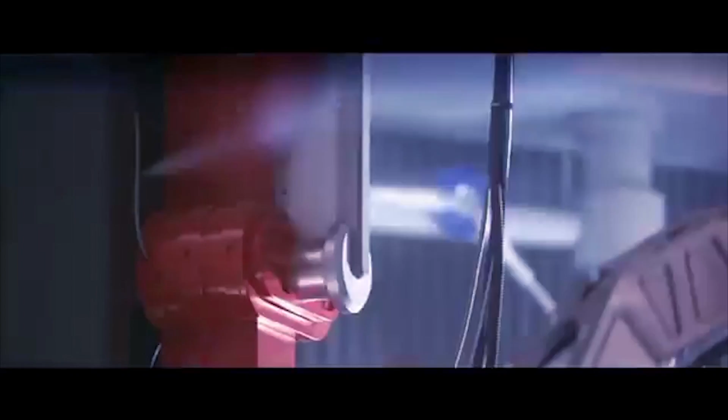Initiate drop sequence. Notice the device on her forehead. 1992 - that's Pierce Brosnan for those of you who don't recognize him. I never plug a program when I'm engaged. You just move the whole effect. Gentlemen, I'm thankful to say it's been 17 years since we last had occasion to use this camera.

So what we saw there was telepresence with Jodie Foster. We saw virtual reality - in 1992, one would wonder if Palmer Luckey saw this movie, and over 20 years later got $2 billion from Facebook to make exactly that device. And third was the augmented reality of the glasses.

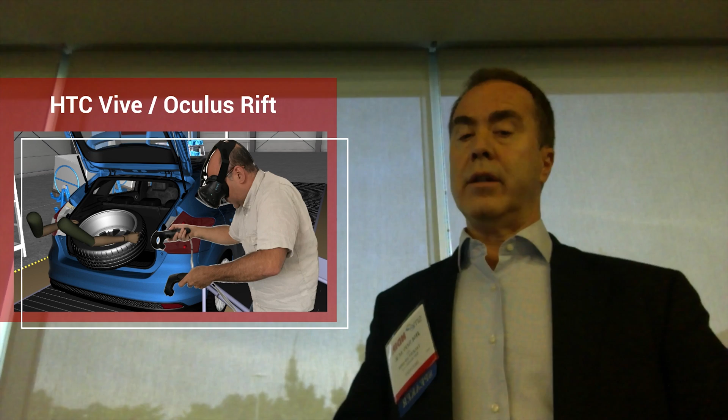We have the HTC Vive and the Oculus Rift for virtual reality, which we all know now. Here's a very good example, similar to the ones Michael showed—this is a company we collaborate with in France. They're actually certifying their operators.

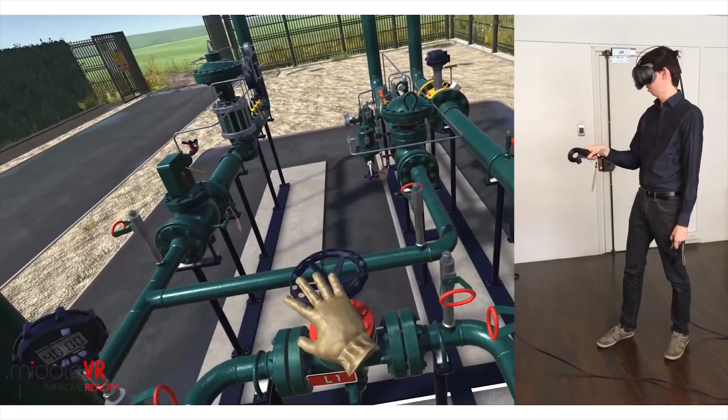Notice that the pressure—sorry about the sound, it's too loud. But the point is that this is being used today to certify gas operators before they go out in the field. Obviously the same thing can be done with any kind of complex machinery.

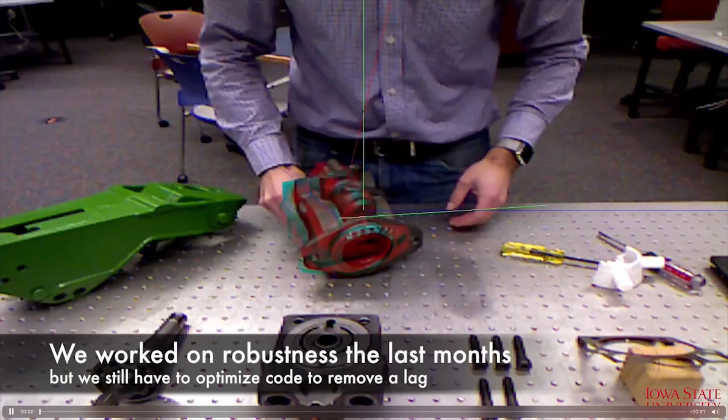HoloLens, everybody knows. This is a very good application of augmented reality where you see the part superimposed on your field of vision—it's kind of magic. This is obviously a very good application if you're doing complex assembly.

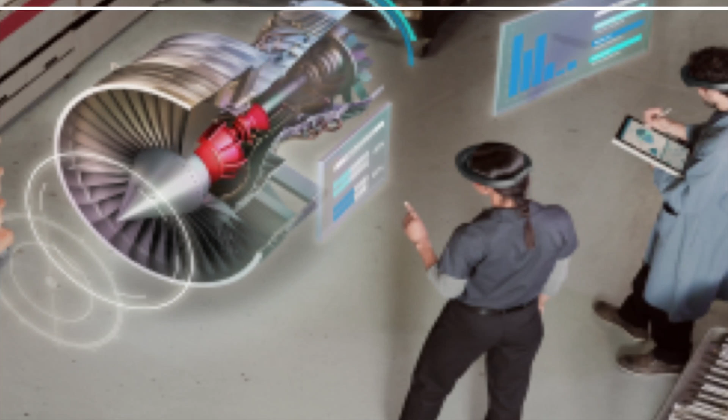The problem is that building these systems requires quite a bit of time, effort, and money. And if it's something somebody does rarely, it doesn't really make a lot of sense economically.

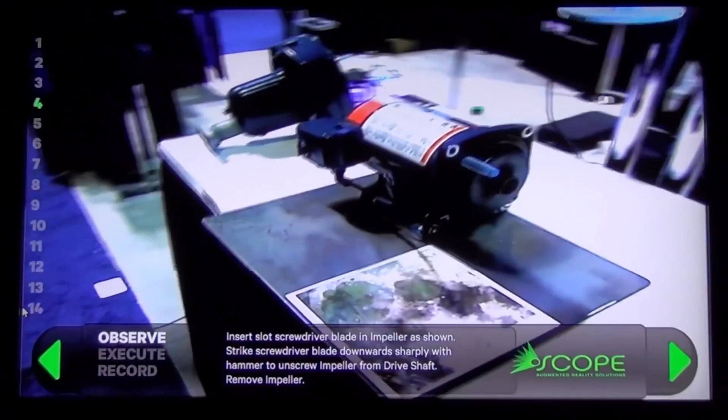Next step, he's going to insert the slotted screwdriver blade into the impeller. There are 20 different ways you can remove that impeller, but the best way is exactly how we're showing it. He's able to insert that screwdriver, tap it with a hammer, and it spins right off the end.

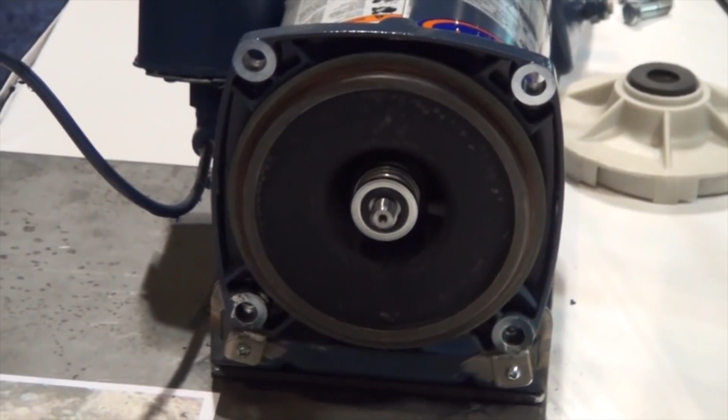Once again, he sees it and does it. The reason I show this is because try explaining that procedure in text, in a manual—it would be impossible. So that's a very good application of augmented reality for a procedure that, if someone does it wrong, will break the hammer, break the impeller, and cause a lot of problems.

She's going to help us with the HoloLens version of this now. So what I'd like you to do is put on the HoloLens, and she's going to look at that same catalog page and see it from the HoloLens view. Go ahead.

She sees the same model—if you notice, even the change note is there. I don't work for Microsoft. She's using HoloLens, so she's not tethered to this piece of paper or the catalog; she can bring this catalog to life. Go ahead, take the loader, and put it on the stage for us. Great, happy to trigger that animation.

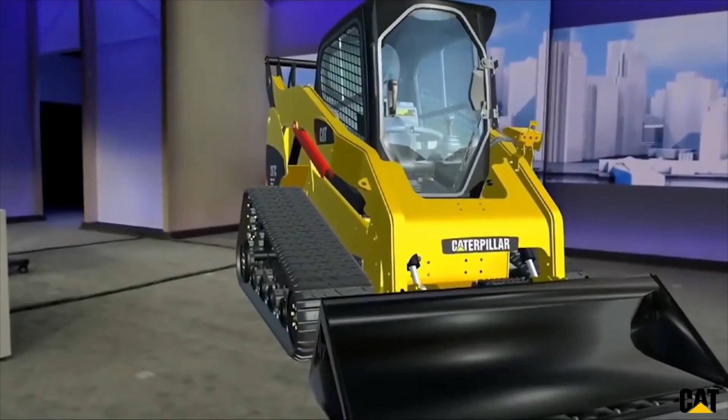This is what you see. And what's unique about this mixed reality experience is that prospective Caterpillar customers can view the Caterpillar at true size and scale. Caterpillar, change configuration.

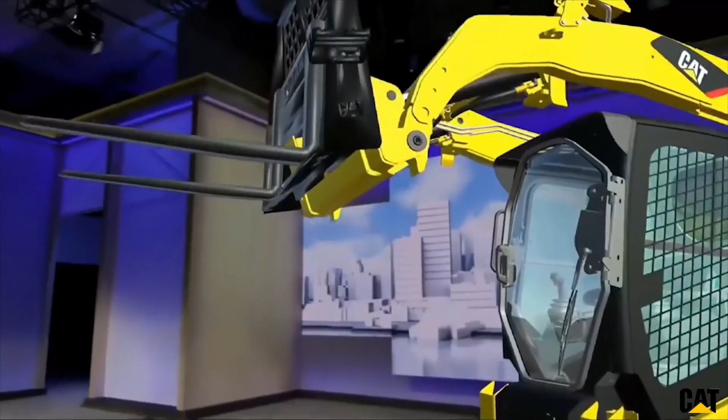Oh, I like that. So when they talk about the magic of software, I think it's all right there. Hardware, software, the cloud, bringing it all together in a real-world scenario. I think what I've done is gone out and tried to find the very best examples of the different technologies, and I think that one is particularly compelling.

More and more today, people are working remotely. They're not all located in the same physical building. Imagine being able to change the people you're meeting with, the place where you're meeting, or the content that you're collaborating around, all in a matter of seconds. It really unlocks new possibilities for the way that information workers can be productive.

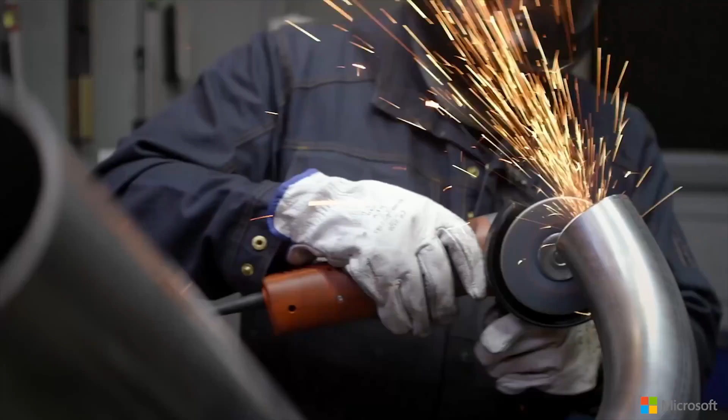Inherently saying you want a PC on every desk implies that people have desks. But we know that there's a huge part of the workforce that actually doesn't have desks. In fact, we think 80% of the workforce are what we call first-line workers, and we think they number over 2 billion worldwide. When computers have the ability to understand the real world, a bunch of really powerful things can happen.

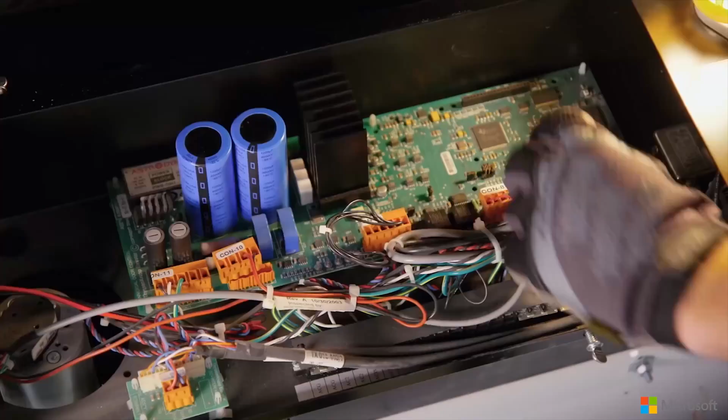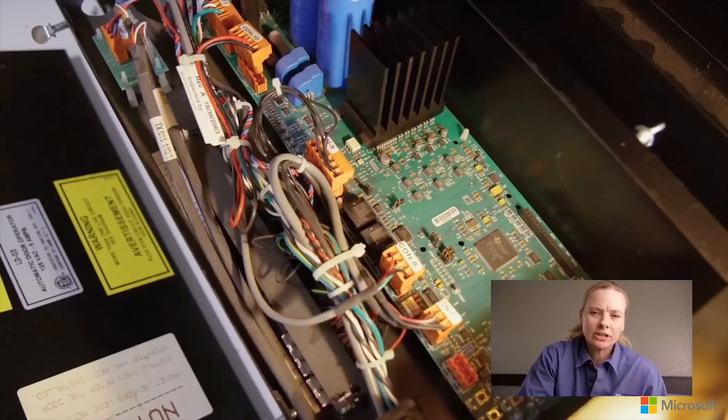We've been looking at the critical workflows for the first-line worker, and we are committed to bringing products to market to help them do their jobs more effectively. One of the first critical workflows we uncovered was for the field service worker who often needs to call in for expert help. With mixed reality, we can bring the expert to them, and the expert can see what they're seeing, annotate into their space, help them solve the problem, and verify it's been done correctly.

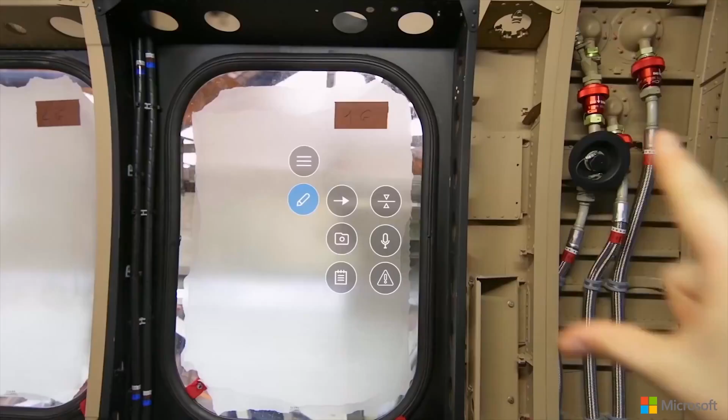Another critical workflow we've uncovered is around training employees on new products, processes, equipment. Companies are spending a lot of time and money on this today, and these things change often, and they're so critical to their operations.

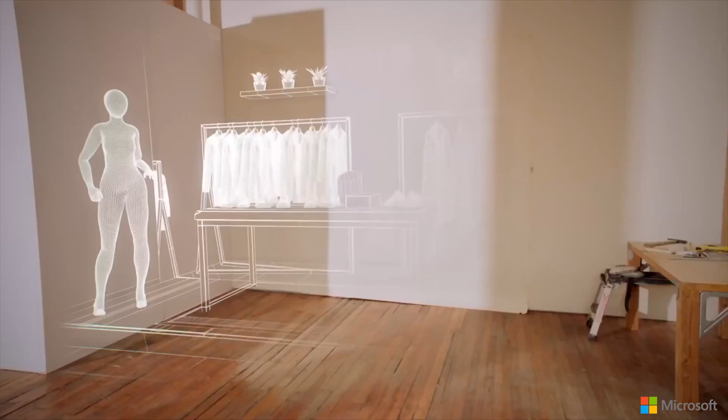Another area of opportunity is around space planning. Companies need help designing and planning out their spaces efficiently. Mixed reality enables them to view their designs with digital objects at scale, and they can walk through them and iterate before they have to make the costly decisions. I think all those things come together to shape what this modern workplace looks like as we go forward.

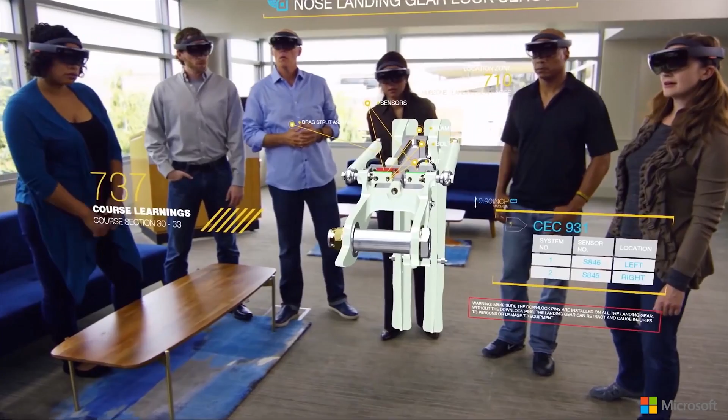Digital transformation is really impacting every industry, every company today. And the companies that we see that are most successful at digital transformation are those that empower their employees and rethink the employee experience all the way from the boardroom to the information worker and then onto the first-line worker.

Sorry about the long Microsoft ad, but I thought it was also very useful to quickly show some of the things where they're targeting.

A lot of you may also know ODG. They also have a HoloLens-like device, and this is a telepresence device for ATEX or explosion environments.

What's the benefit of that? That's simply telepresence, like we saw Jodie Foster in the first segment, where I can guide somebody in an explosion environment, an ATEX environment, and that person can basically be my avatar.

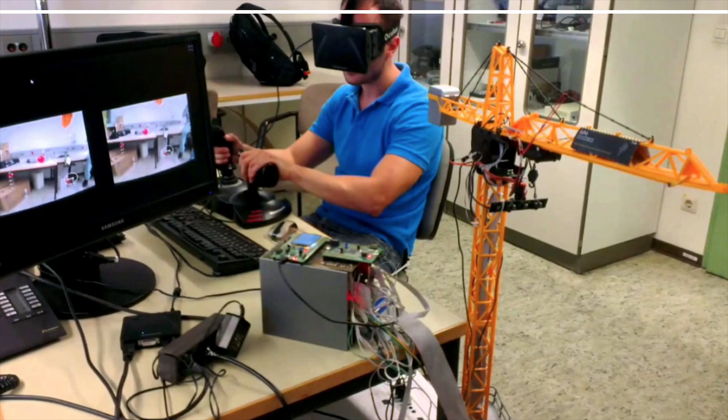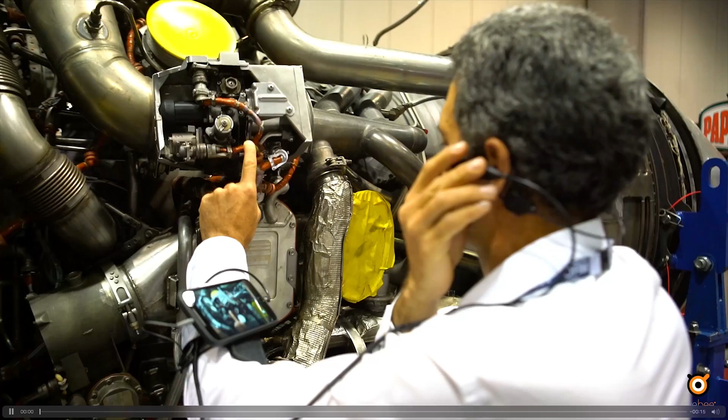It's a Wi-Fi camera that connects to the phone. There's another device, full disclosure, this is something that we manufacture. We said, okay, let's do telepresence because HoloLens is still only usable for about 1 hour, and what we want right now is something that we can use today. So what we did, and later you can come and see it, I'll show it easier.

It consists of a high definition 30 frames per second camera connected to an Android phone that goes on the arm. We modified the Android operating system to accept a USB connection, which is not normally allowed by Android, but we did this in such a way that the phone is not rooted, and it works with all of the video conferencing applications: Skype, WhatsApp, WebEx. So that's a very simple $1,000 for the whole kit, if you guys want to see it later.

That enables somebody remote anywhere in the world to operate under your instructions with no latency. That means there isn't that 1.5 second delay that Wi-Fi would introduce, because it's wired. So you don't have FOD dangers when you're working on aircraft.

Very quickly, implementation roadmap in your facilities: ask for help, find out what problems the people there have, get their buy-in, start small and sell the vision. Fail fast and often, because people have to be involved in the process. Measure, measure, measure—use KPIs to see if this is really worth it, look at the gains, and celebrate the collaborative success.

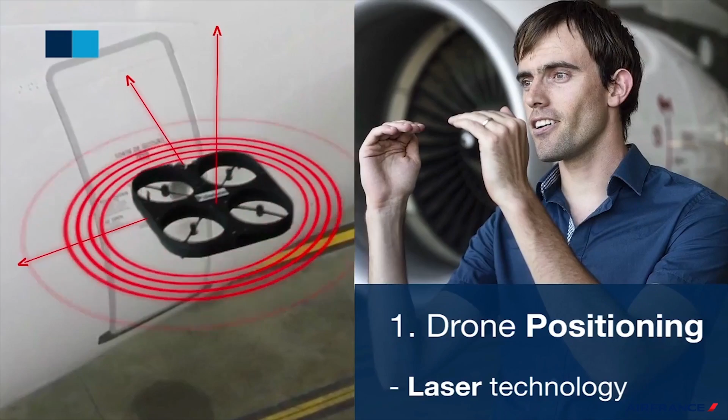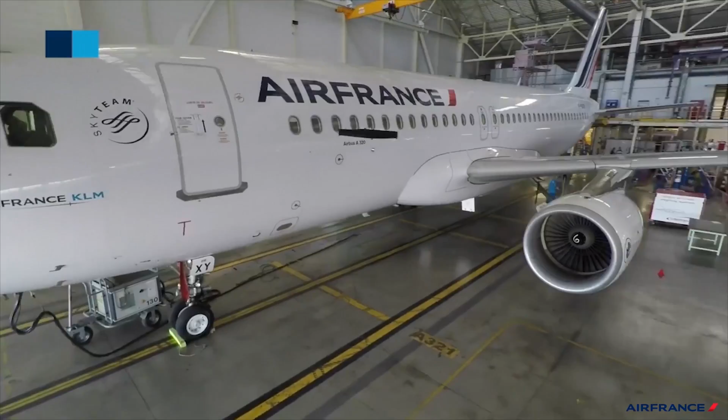Drone inspection—I thought this would be useful for this crowd. This is Air France. The drone uses laser technology to position itself relative to the aircraft. We load the 3D model of the aircraft onto the drone, and using the laser scanners, the drone can autonomously navigate around the aircraft. It can be extended to other types of inspection, such as lightning strikes.

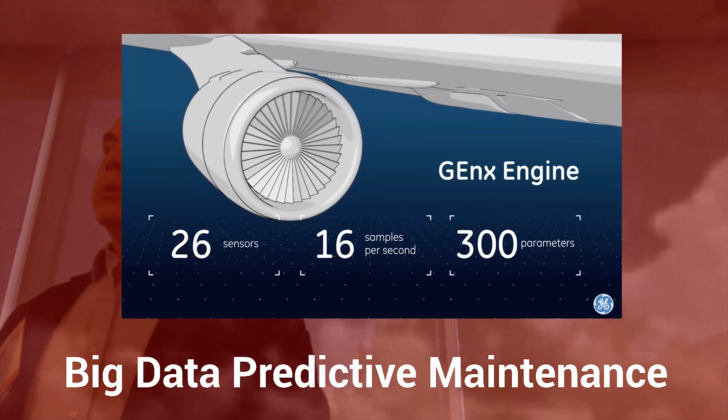Like I said, I brought samples from all over. This is a very interesting application, which probably most of you already know—Predix from General Electric—that monitors the health and performance of their jet engines in flight.

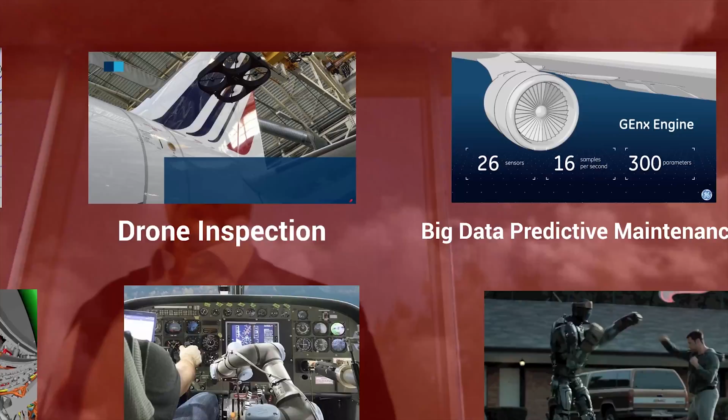Now we get to the meat of the matter. We all dream of the paradigm of paperless maintenance, of airplanes in service 10, 20, 30, 40 years, and we want to know everything that's happened to them. Maybe in the military there might be different standards, but in the commercial space you basically still get boxes of greasy papers signed off by mechanics during the life cycle of that airplane. That is necessary because leasing companies require that documentation in order to sell the aircraft to the people down the tiers of use.

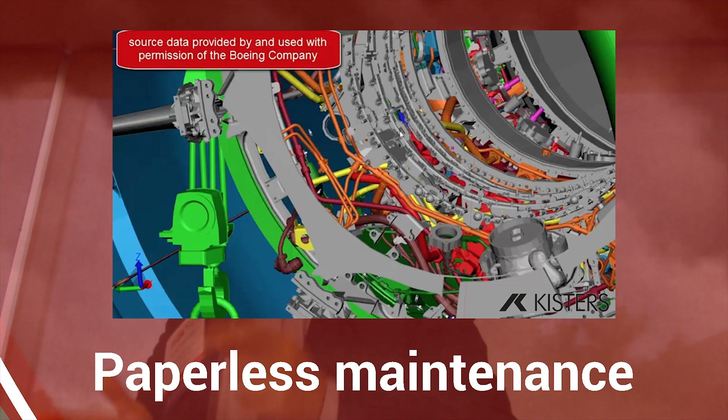But what we believe is that instead of creating virtual models, why not identify each object of the plane as a discrete object from the moment it is designed, assembled, and maintained during its entire life cycle. Each object identified uniquely and blockchain secured, like Kenneth was talking about before. For those of you who want more information on those subjects, I'll give you my business card—I have both the military and commercial papers on blockchain use and what they call digital twin and digital thread.

This is a company, Kisters, that produces real-time views of the objects. This is Boeing, and it's about 1 million parts. The advantage of using these rendering engines over Unity or Unreal, which are video game environments, is that this produces renders in real time. The problem with Unity and Unreal is that normally you have to compile those objects, so changes aren't instantly updated. What we're talking about is a collaboration.

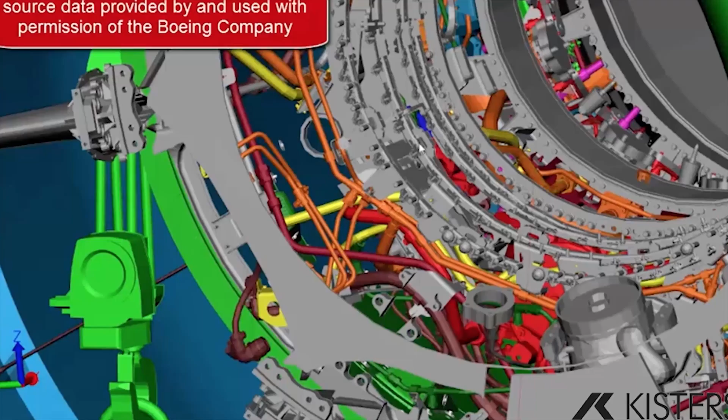Let's see, wait, I might have skipped something here. I'll just let that play out.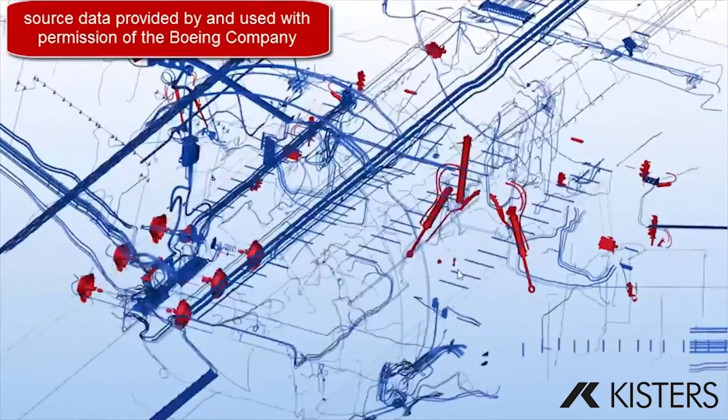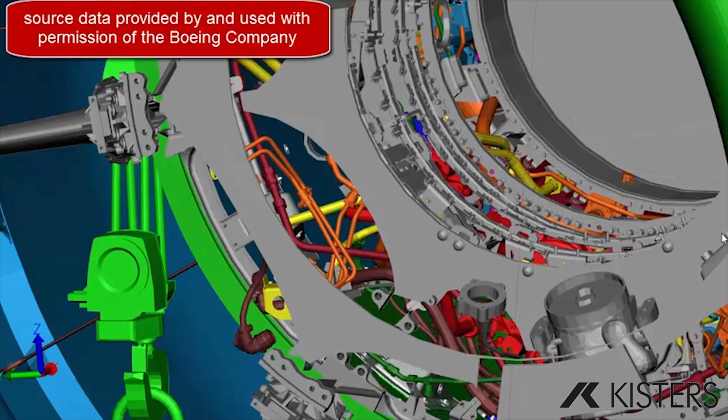This is critical for you guys to understand—we're talking about a new way of thinking of complex objects. Instead of geometric shapes, we think of them as a collection of individual parts. If those parts are individually determined by their supplier, then we have all of that long tail and metadata during the entire life cycle of that plane, building, refinery, whatever.

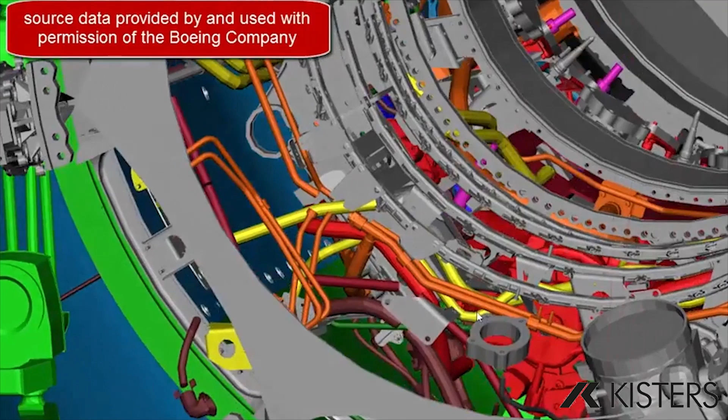Okay, let me just make sure this is done. Good.